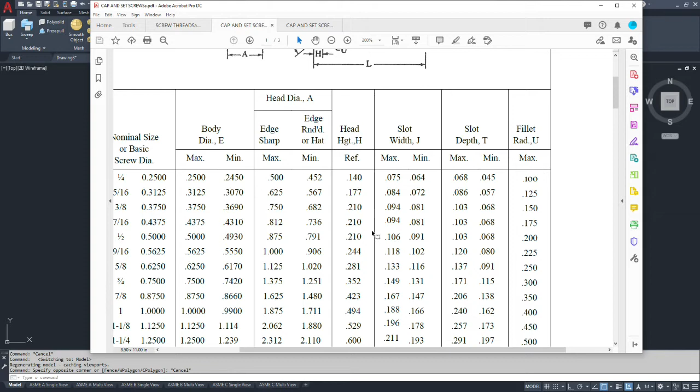So we're going to reference our chart. As you can see, the overall length of the flathead screw is from the top of the head to the tip. So the length that actually goes through your plates would be the dimension L minus H.

Alright, so what I'm going to do is I'm going to start as I typically do. We're going to go world coordinate system, and we're going to model in the front view.

I'm going to start drawing a couple lines that will start on origin, in both directions. Once you pick up origin, I would turn off the grid snap.

Okay, so we're going to put the head on this side, thread on this side. Let's start with the head, and we go back to our chart, for a 1/4 inch diameter flathead screw. The A diameter is the diameter of the head. So we're going to look at A, and it's actually for a sharp flathead, it's a 1/2 inch in diameter.

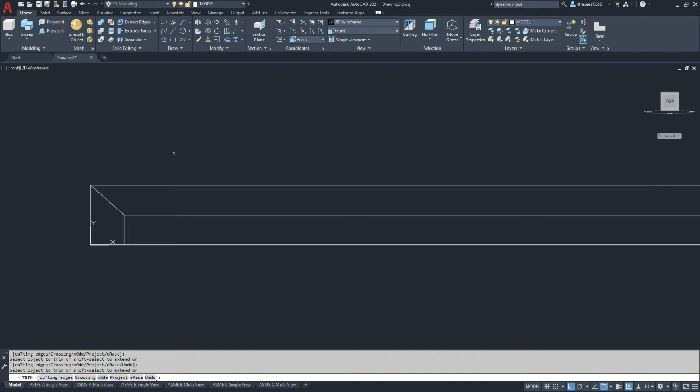Now, I've calculated the plate I'm going to make is I'm going to need a 1/2 inch plus an 1/8 inch. That would be 5/8, nominally 5/8. Now I've got 140 thousandths here, so I need to add that and round to the next fractional size. And again, you need to decide how long your fastener needs to be.

So if I start with a 1/2 inch for the hole, and I'm approximating, I'm going to go through another 0.125 of material in my plate, and then I add H, which is 0.14. That gives me a fastener of 0.765 long, which I'm going to say is close enough to a 3/4 inch overall length.

So I'm going to do an offset of 0.75. I'm going to offset from the top of the flat to the end of the fastener, because that's how they're sized.

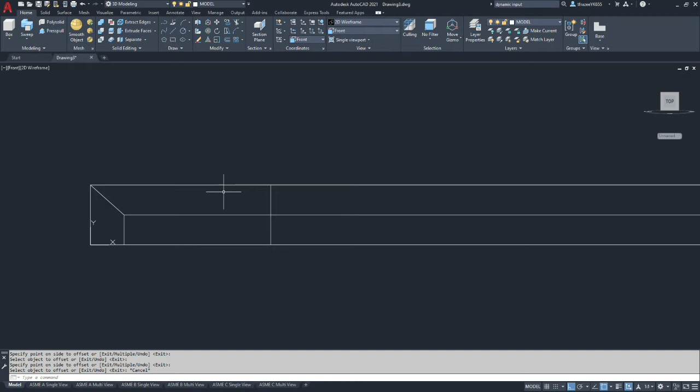At this point, I can delete the outside line, and we can trim off the other ones. I don't need this vertical line here either. Alright, so let's go to a home view, and I guess I have an erroneous line out here I don't need.

So at this point, I need to take and type the join command, and I'm going to join all of these features into one entity, which will allow me to revolve it.

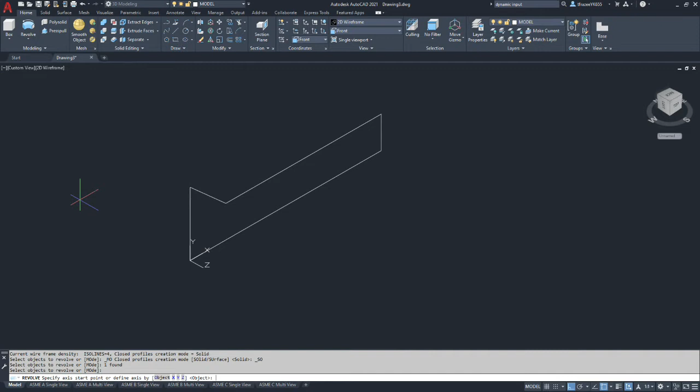Now we're going to go to the solid command, revolve. We're going to select our profile. We're going to hit enter to accept the profile, and then it's going to ask us what axis we're going to revolve around. Mine's drawn in line with the x-axis on center line, so I'm going to type X.

And now it's asking how many degrees you want to go. I'm going to go 360. And that should be the base shape of the actual screw.

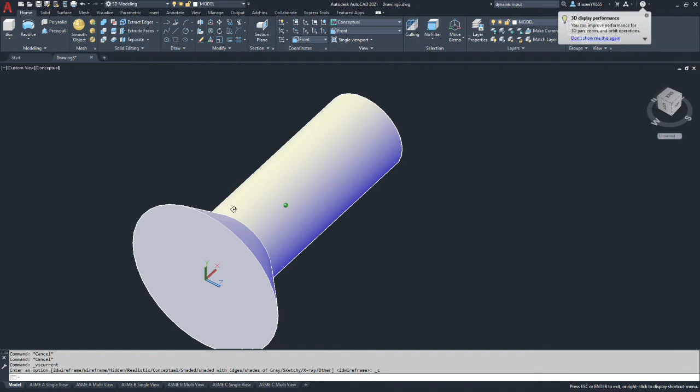Okay, so like I said in the instructions, you can make this any drive type you want. I'm going to make it slotted since that's one of the easiest. Let's see if our chart gives us any information on that. Yeah, J is the slot width, and slot depth is T. So we have a slot width of 0.075 maximum with a depth of

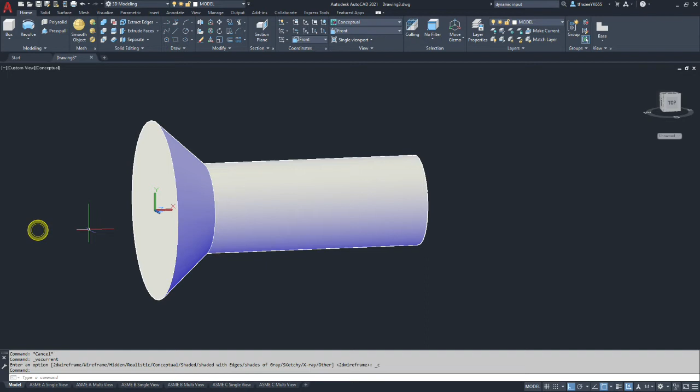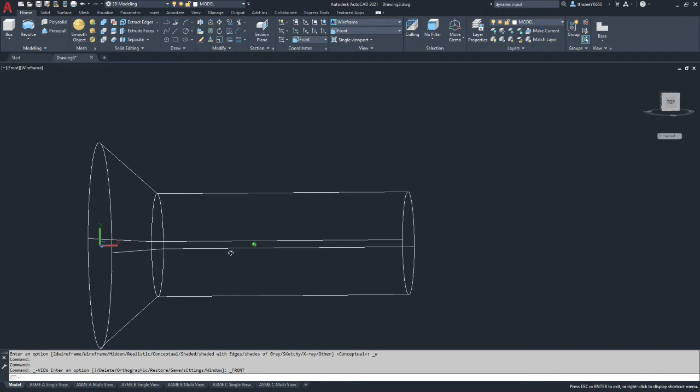0.068 maximum. Okay, so we'll go back to wireframe, and we're going to look at this from the front view. And I'm going to switch the construction layer so you can see what I'm drawing. And I'm going to draw a line from origin all the way to the left, and draw another line from origin up to the top.

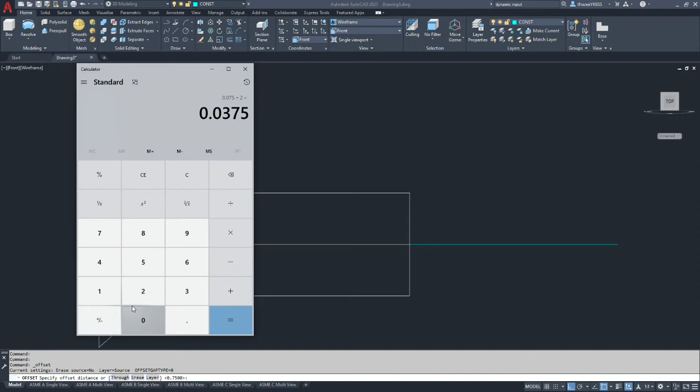And our chart said that we could be a width of 0.075 maximum, so we'll do an offset of 0.075 divided by 2, because we're doing an off center line, gives us 0.0375. So we're going to do an offset of 0.0375, and we'll offset the cyan center line in both directions.

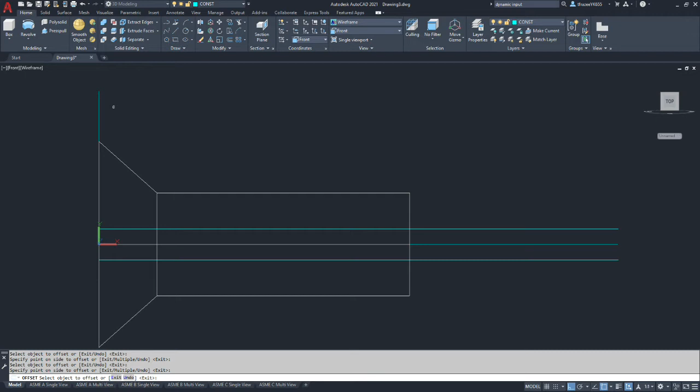We're then going to offset from the end 0.068, which was the maximum depth, to the right. And so we're going to close up this rectangle using extend, and then trim up.

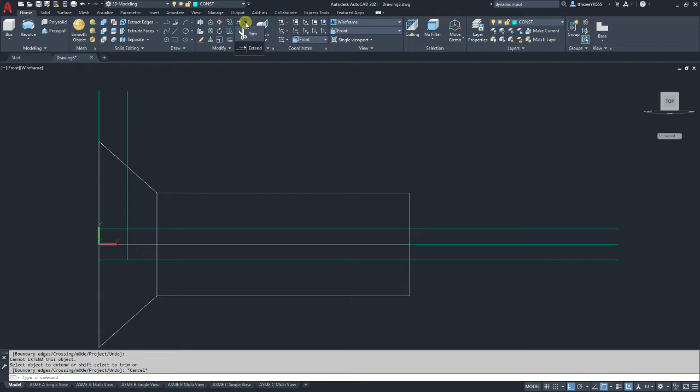The box. For some reason that didn't want to extend. There we go. And we don't need the line that's on center.

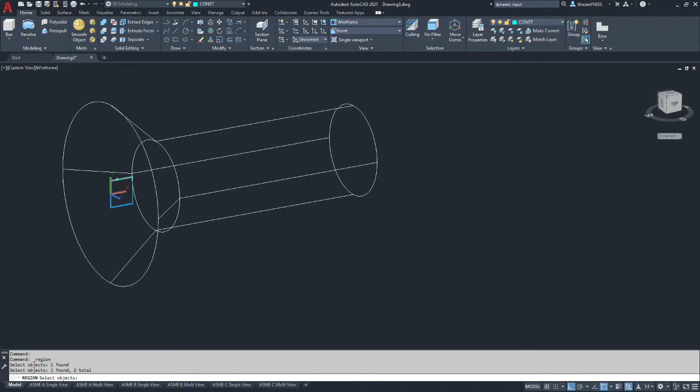So we'll now use that profile. Okay, we're going to go to draw. We're going to make a region. You gotta be kidding me.

We're going to go and do an extrude. We're going to select the region. We'll go out, whatever that is.

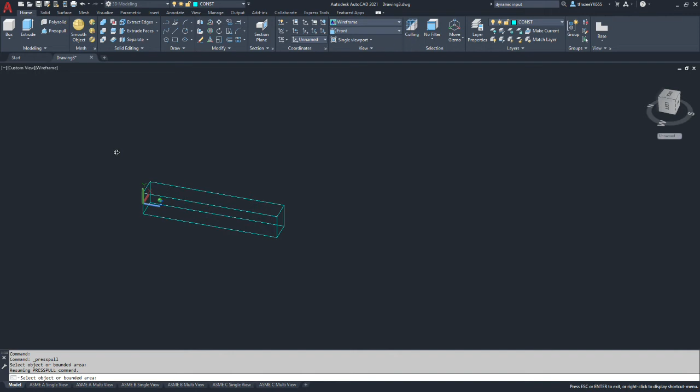Alright, I'm going to try a different little trick. I'm going to go and hide the model, and then it'll allow me to do a press pull on the end. And we'll go out another arbitrary amount. And we'll go and make the model visible again.

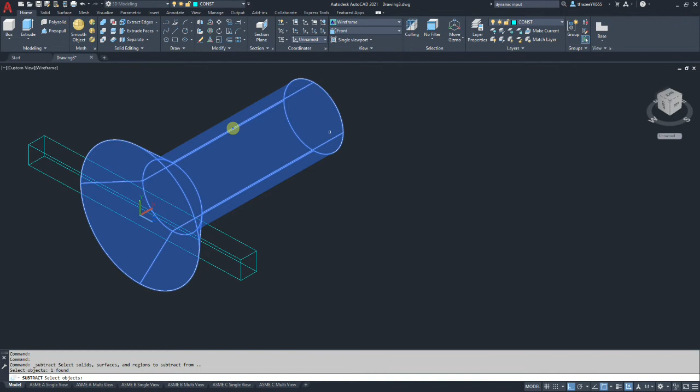Alright, so we have like a key that we can use. And we're going to do a body subtract, select the screw, accept that selection. We're going to remove the cyan part, and that leaves us with our slotted head screw.

Okay, now we're going to set up for the thread, and I'm going to make this one fully threaded, which means it runs right up to the head.

Okay, so I'm going to create a line. We're in the front view, which is good. We're going to go from center to center, and that gives me a line right on center line. Now I can offset for our major diameter, which is 0.125, so it's half the quarter-inch diameter, and then we'll offset that line. Now we need the minor diameter.

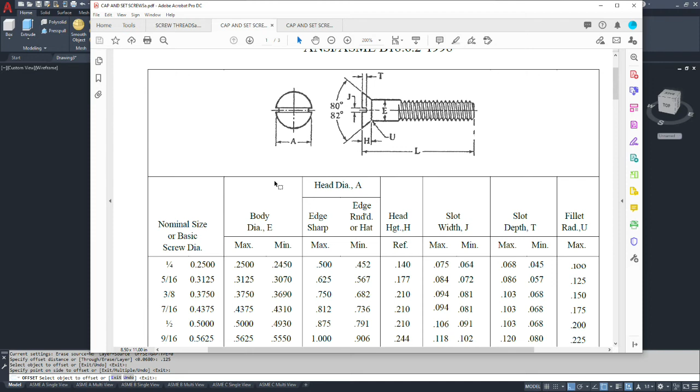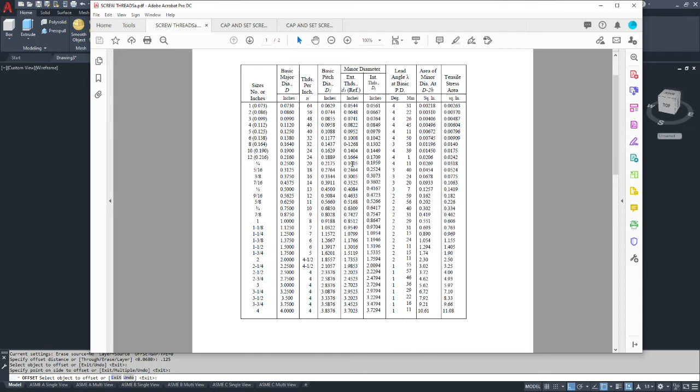I'm going to go to my chart, and we're going to look at the screw thread chart. And for a quarter 20 thread, the exterior thread minor diameter is 0.1905. So we get our handy dandy calculator out again, 0.1905, and divide that in half, so we've got a radius. And that was not right.

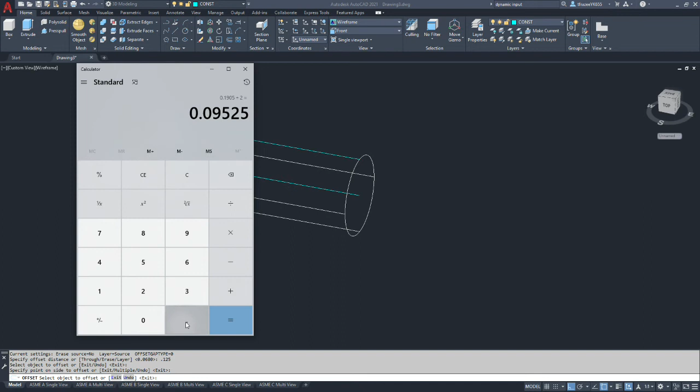We take 0.1905, divide that by 2, and it gives us 0.09525, which is our offset from the center line. Okay, so we're going to offset that amount, and offset up. So that gives us the difference between the major and minor diameter in a thread.

And I'm going to create a line on the endpoints of that. Now I want to offset this line by the thread pitch. So the offset should be 1 divided by 20. Threads per inch is 0.05, so 50 thousandths. And I offset the other line.

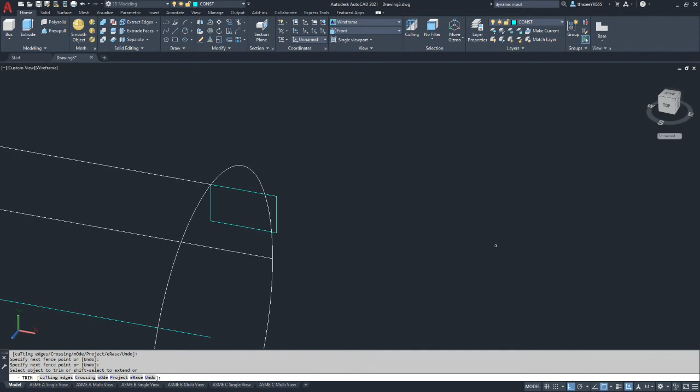Now I'm going to use a method where I extend the lines on the top and bottom, and then I'm going to trim those off. Okay, we're going to rotate this part 30 degrees, which gives us part of our thread. We're going to go and then repeat that on the opposite side here.

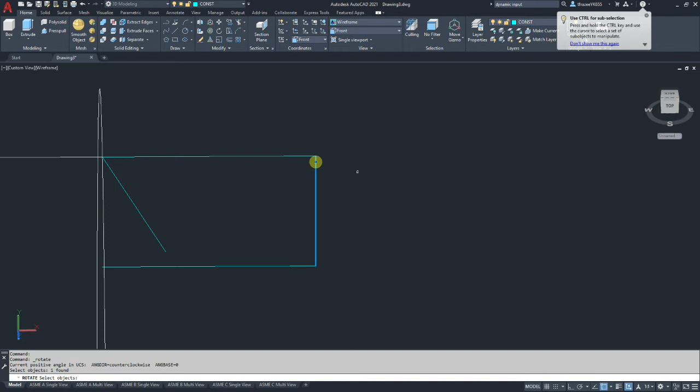Base point will be here. We're going to negative 30. Now we're going to extend the lines out.

Now our pitch is not from sharp to sharp in this Unified National Fine or Coarse series. There's actually a flat, and the crests are a theoretical point at the top. So right now we have ours a little too far apart by half.

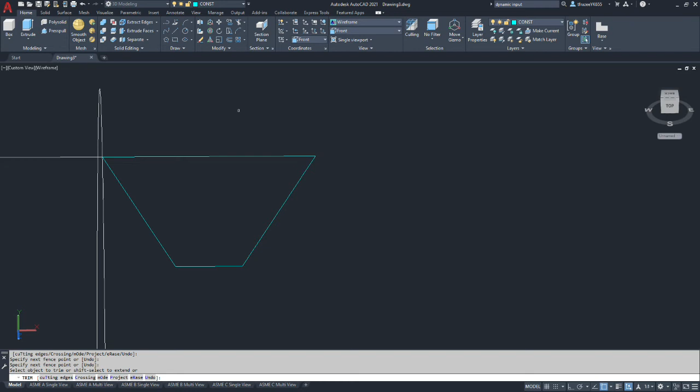We're going to split this flat between the root and the top. So a quick way to do that would be to use the move command to move the line on the right, and we're going to go from endpoint to midpoint, and we've now split the difference.

Trim off the tails, and you now have this shape to drive around for that particular thread size. We're now going to type join, and we're going to select the profile of the thread to make it all one piece. Okay, so now all we need to do is do the helix.

So we're going to go up to draw, and we're going to select the helix command. Looks like a coil. And it's asking us to specify the center of our helix. So we're going to pick the right side of our cyan line we have.

And we need to make sure that we're in first world coordinate systems and then the right side view. We want our coil to be in that diameter of the right side view.

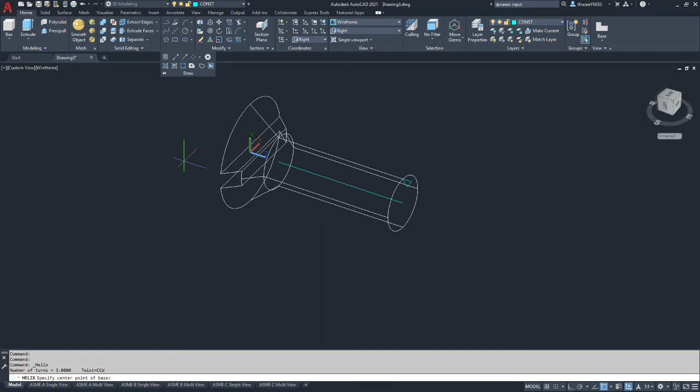So now we're going to go to draw. We're going to select helix, just like coil. And we're going to select the right hand end of the cyan line we have there.

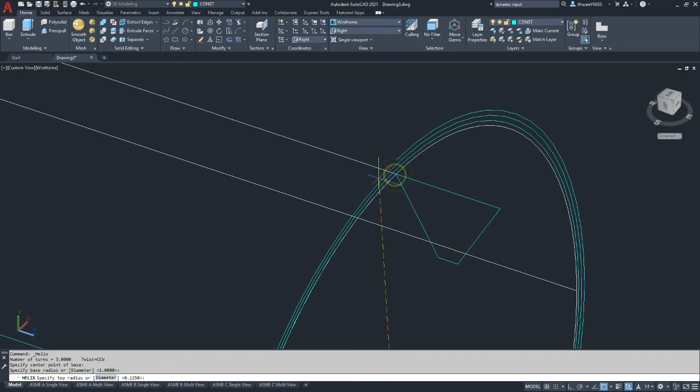And now it's asking for a diameter. We're going to select the diameter of this end to match the top end of our profile we're going to do our cutting with. Now it's asking what our second diameter is for the helix itself, and we want it to be the same. So it's going to be a quarter of an inch diameter, or

0.125 radius. Okay, so now we have the correct radius. And now we need to check the twist. So we want a right hand thread, which would be clockwise. Type W. And we're going to go CW, which is clockwise, which gives us the correct spiral.

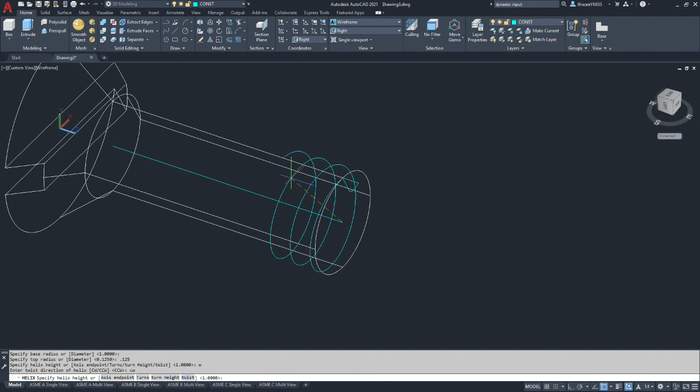Now we need to set the spacing. So that would be under turn height. And the value you're going to put in there is the thread pitch, which is 0.05. And that gives us the correct spacing for a quarter inch thread.

And now you can select the opposite end of the line we drew for the length of the thread. We now have the helix path to drive our shape across to do our cut.

Before we do that cut, we want to put the chamfer on the front of the screw. I left it sharp intentionally so we could use it for construction, but now we do want to put it on there before we cut the thread itself.

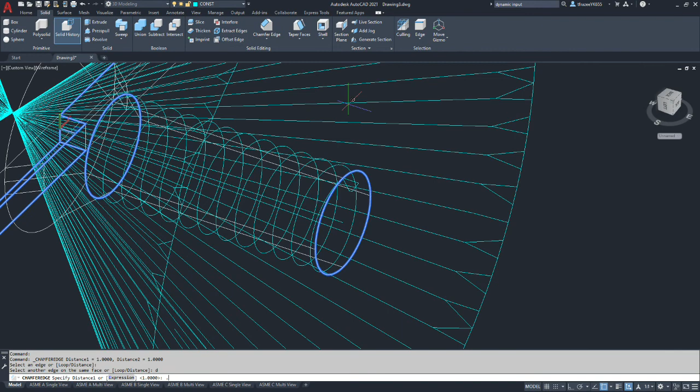So go to the solid command, we're going to do chamfer edge, you're going to pick the front of the solid, and it's defaulting to some gigantic chamfer. You're going to type a D for distance, and we're going to put 0.01 by 0.01, and we should have a realistic chamfer at that point.

Now we're ready to do our sweep. So go to home, select down on extrude, we're going to select sweep. It's going to first ask you the profile you want to use as your cutting tool. We're going to accept that by hitting enter, and we're going to type A for alignment, and it's asking is it perpendicular to the path, which it is not. We're going to hit no.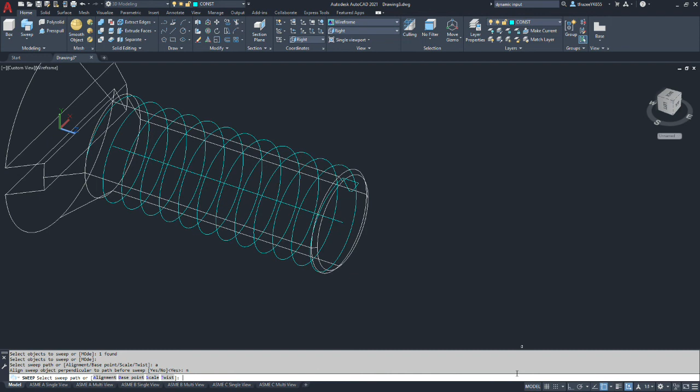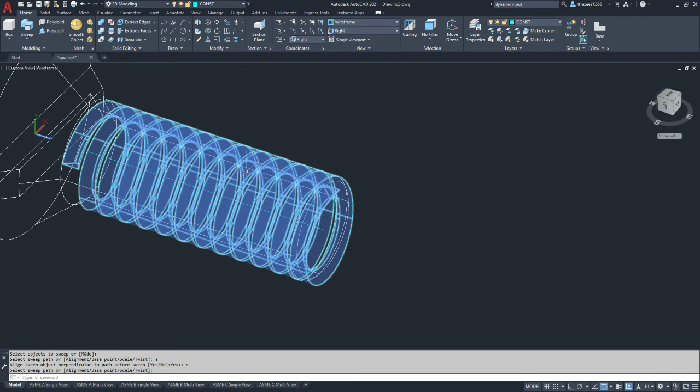And then provided you drew your profile, made it up, that's intersecting the actual path in the correct orientation, you don't have to do anything else but select the coil. If they're not lined up, you need to select the base point of the corresponding corner of your path. So select the coil, and the helix, and it's creating a solid body that is in cyan.

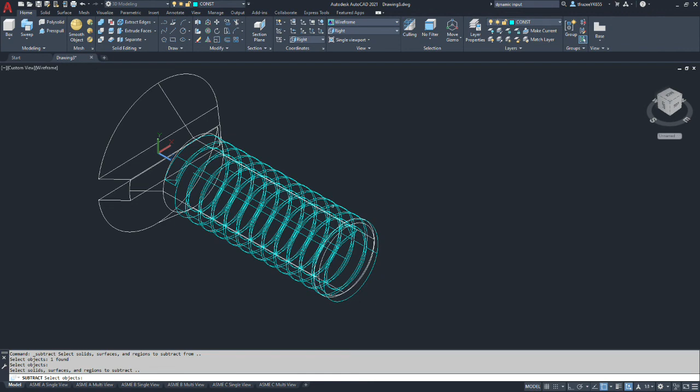Okay, we're going to use that body to cut the screw thread. So now we go to a solid subtract, select the main screw body as the piece to keep, hit enter, and then we want to select the cyan body that's the cutting thread and hit enter. And it should have removed away, and we have a screw thread that looks like so.

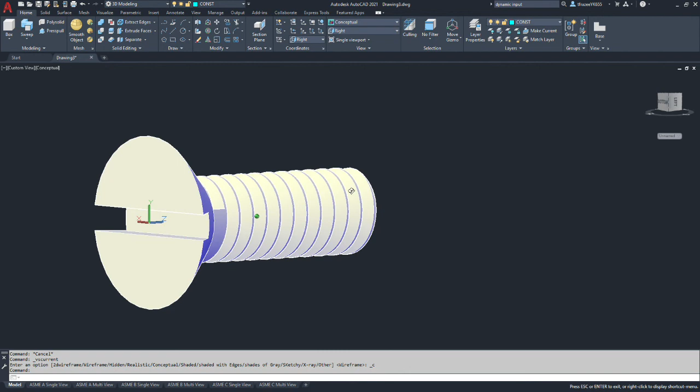The end looks funny because of where the thread starts. Now again, you need to use design thinking to set the proper length for this screw.

That's it. That's the third tutorial, and that is to teach you how to do the flathead screw.